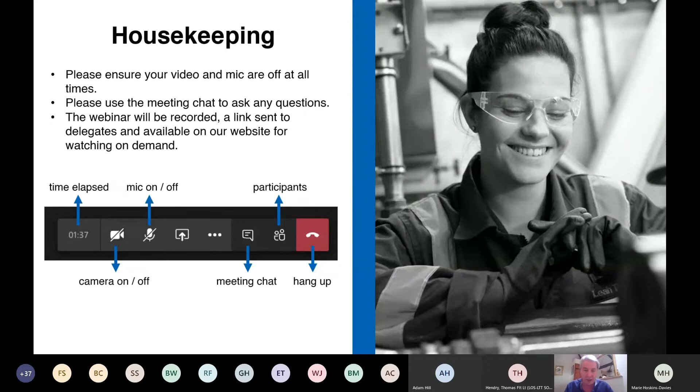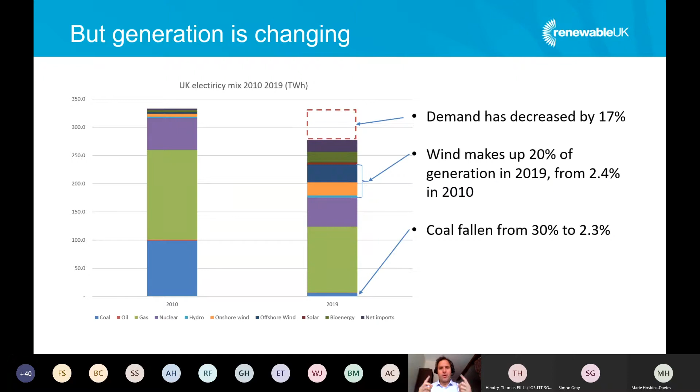What has driven that? If we go to the next slide - two things are driving that and will continue to drive that. The first is the need to decarbonise our energy system and our whole economy. We have the Climate Change Act in 2008 which committed us to reducing emissions, and the update to that committed us to net zero emissions by 2050. So we've got to get emissions out of the energy system, and the easiest place to start that has been power. What that's then also driven - that investment and subsidies in renewable generation has supported those industries, and you've seen costs come down. So that's really accelerating this transition from these fossil fuel generation plants to many now millions of small scale and large scale renewable generation of offshore wind, onshore wind and solar in particular.

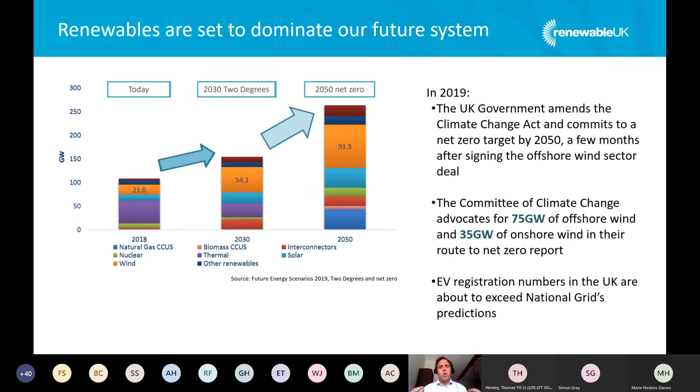So we're seeing this massive change. And what that also means, if we skip onto the next slide, is this sort of change from centralized power generation. In the diamond, you've got the way the system used to be - centralized power generation, then through the transmission and distribution system, bringing power through the wires to user demand, whether that is households or industry or whatever. We have then introduced renewable generation into the mix, and that has started to decarbonise things, but it's going to continue accelerating. As I said at the start, we're moving towards this whole system solution.

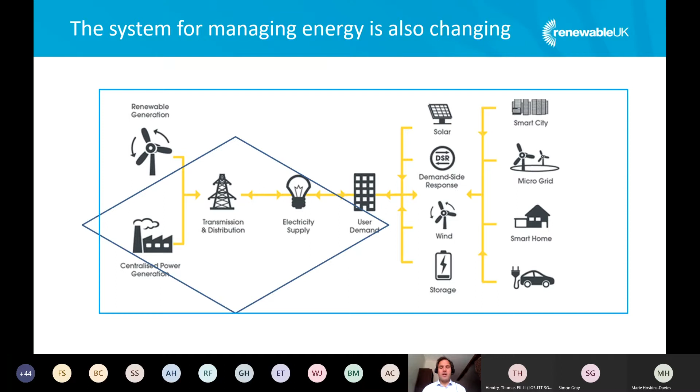And what that means is that because we've got lots more renewable energy on the system, which is cheap and clean, lots of other people are starting to think about how they can take advantage of it and use it in various ways. So we're seeing small scale solar come onto the system - rather than large generation sites, we've got solar on rooftops, and similarly with wind. With electricity costs coming down and renewable electricity costs coming down, we're looking at how we can store it through battery systems, and Matt's going to talk a little bit about that as well. Obviously, cheap electricity is green electricity, and with battery costs coming down, we're starting to see electric vehicles decarbonise. So rather than everyone going to the petrol station to their petrol pump, we're seeing the system change, and all these sectors come together.

Just to jump onto the next slide - we see households changing as well. So the house of the future on the left has lots of electrification in there, heat pumps and now things like renewable heat, battery storage, and thermal storage at home. So again, these sectors are coming together. Everything's being electrified. We're also introducing green hydrogen, powered by new renewable electricity, to turn water into hydrogen and oxygen - that'll decarbonize heat as well. So again, renewable electricity creating green gas, power for vehicles.

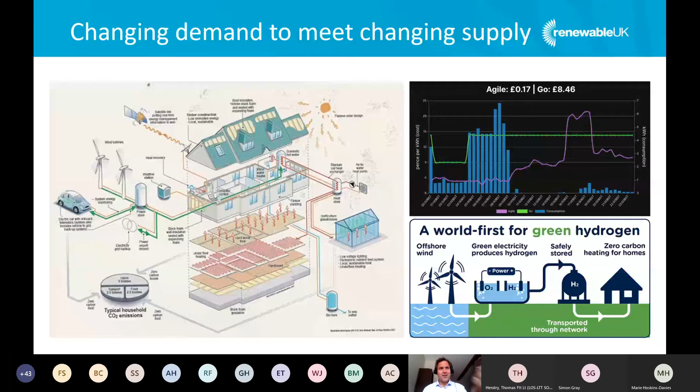Really rapid run through, I think I've gone a couple minutes over, apologies. But over to Matt to say what that means for solar and wind.

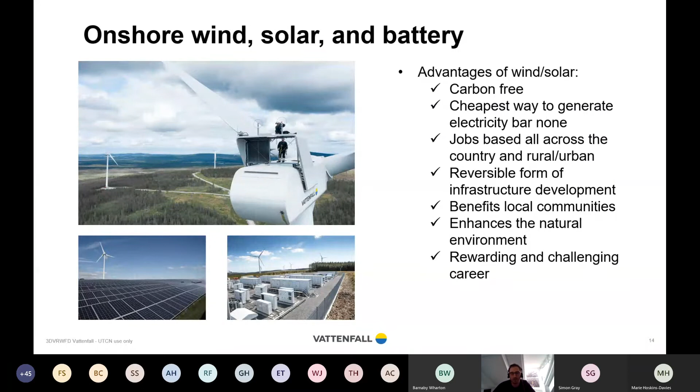If you could skip on one, please. Thank you. This is a little bit of a recap really on what Barney's already covered.

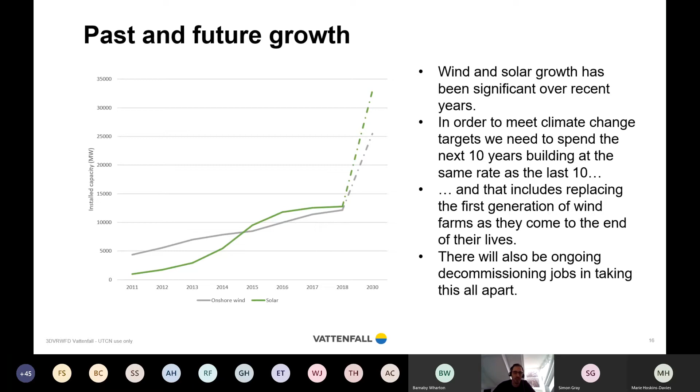The point of this slide really is to say, well, you haven't missed the boat in terms of transferring a career into renewables. We've seen significant growth, the green line for solar and the grey line for onshore wind. We've seen significant growth in installed capacity, but we basically need to do again what we've done over the last 10 years over the 2020s.

Throughout the operational life of onshore wind, solar or battery, there are things in project management, in communications, technical jobs in wind resource and in environmental issues, legal matters, construction management, aviation specialists, technicians, commercial managers, civil engineers, electrical engineers. So there's a huge amount of variety to develop and operate a wind farm.

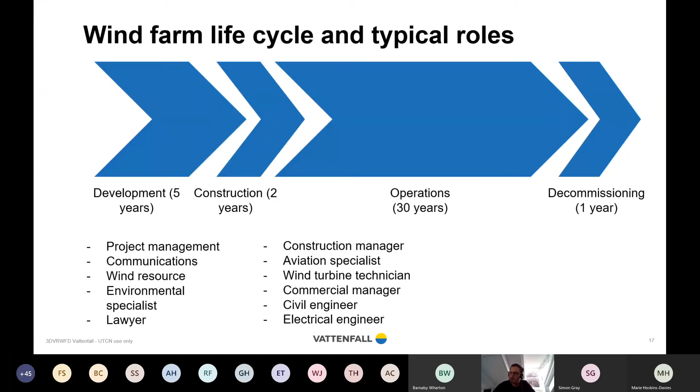Next slide, please. Thanks. And I've done two sort of jobs in Vattenfall really, and I just wanted to reflect on these.

In a public and regulatory affairs role in communications, what's really important is that you're comfortable presenting to people. You've got to be persuasive to politicians. You've got to be able to see the bigger picture—how do government aspirations and energy policy impact on your company? There's a huge amount of information flying around, so sifting through the chatter and noise to understand what the company needs is critical. Energy policy and energy systems are highly complicated, so being able to break those issues down into simple messages is really important.

For onshore wind project management, you've just got to be organized. Basically, you've got to keep track of budgets and timelines, and there's lots of spinning plates. There's a lot of focus on commercial skills—if you're negotiating rents with landowners or contract terms with suppliers, good commercial grounding is really important. Understanding the gist of technical issues, but not getting sucked down into the detail of them. Keeping things happening is probably the most important thing, just keeping momentum. And lastly, resilience against setbacks in your project.

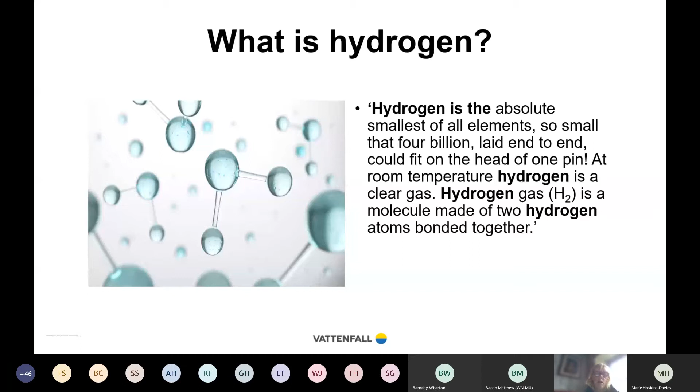Part of the answer to how it will be used, and therefore where the jobs around hydrogen will be created, bearing in mind this is very much future gazing, is around the sectors which are slow or difficult to decarbonize. We know, for example, that heavy industry is very resistant to the decarbonisation process just because of the amount of energy it needs and the temperatures it needs it at. Emissions from industry currently account for about a quarter of all UK emissions, and will need to be cut to nearly zero if we're to meet our climate change ambitions.

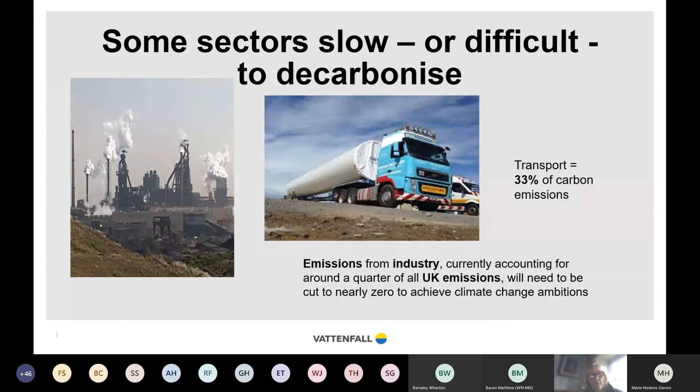Transport, all forms of transport, heavy transport, trains, airplanes, the cars you drive on the roads, account for 33% of carbon emissions. This is another sector where clearly something needs to happen, and hydrogen begins to present something of a solution. Can I have the next slide?

So hydrogen is versatile in terms of supply and use. It's a free energy carrier that can be produced by many energy sources, and it can enable renewables to provide an even greater contribution to the decarbonisation process we're all engaged on at the moment. It has the potential to help with variable outputs from renewables, such as solar photovoltaics.

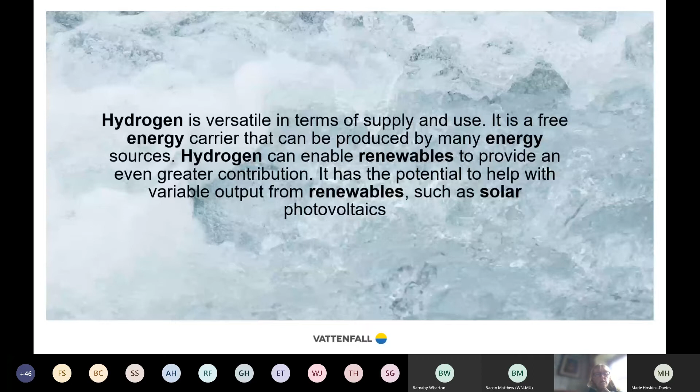So looking to the future, the fact is the future is happening now. So where can hydrogen play a role, and where will we be looking to hopefully invest and diversify into hydrogen going forward?

Well, as an energy carrier to decarbonise processes that are difficult to electrify through direct use of electricity, it can be put into transport fuel cells for heavy, long-distance modes of transport which can't be cost-effectively electrified. I'm particularly thinking about buses and shipping.

Hydrogen is also a feedstock for energy-intensive industries like steel and the chemical sector. Vattenfall in the Nordics is very much engaged with a project called Hybrit, which demonstrates how you can replace the fossil fuels of the past with hydrogen to create the right processes for steel production.

And the one talked about a great deal in the UK is that hydrogen is a provider of flexible fossil-free electricity and heat from combined heat and power plants to support systems with high volatility. This means hydrogen has a large storage potential and is suitable to serve as a flexible fuel in a power system. As the need for renewables increases and there's a need for more flexibility in the system, hydrogen can step in to meet that gap.

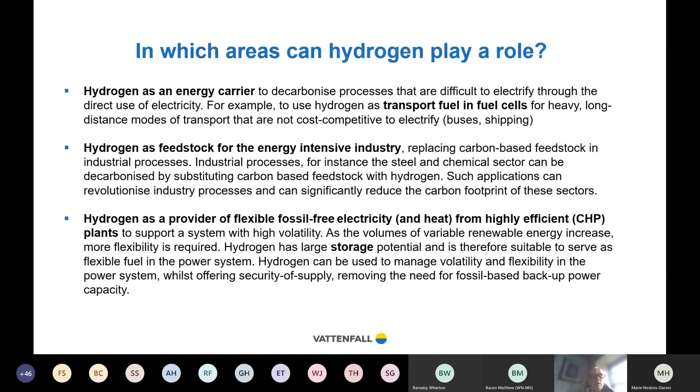Vattenfall has very little on the ground in terms of hydrogen in the UK at the moment, although we are very involved in it elsewhere in Northern Europe. I've already mentioned some of the stuff we're doing in Sweden, but in the Netherlands also, we are engaged in a project to look at hydrogen storage. So we see hydrogen as being an essential fuel for the future, but we also believe the UK could be a world leader in hydrogen production.

However—can we have the last slide, please? We need a few things to happen for that to happen. The first thing I would mention is, and Matt's already talked about the value of onshore wind, but I would also point out that Vattenfall is very much engaged in offshore wind production, and we need an upscaling of the offshore wind industry to bring forward hydrogen at scale.

The reason for that is, as I've already explained, we need renewable electricity to put through an electrolyser to produce the hydrogen at scale that we need.

We need a government hydrogen strategy. Everybody is running around talking about hydrogen in very excited terms, but there are no clear visions coming forward from government—at least the industry is well ahead of it—about where hydrogen can be best used, what this means for jobs, and what this means for the future of the economy. So we need a much clearer idea on all of that.

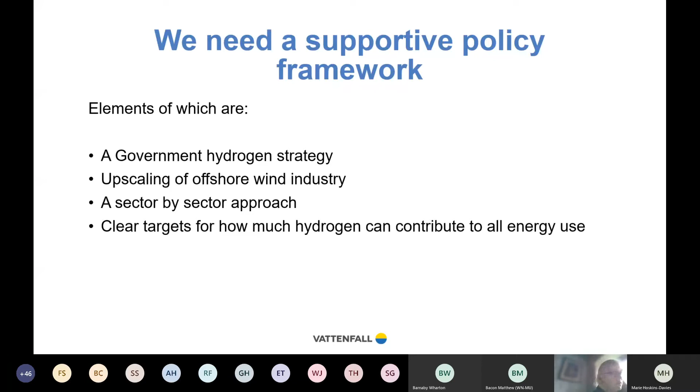Thank you, everybody. My name is Russell Fowler. I work for National Grid, and I look at decarbonisation of transport.

So probably worth giving a brief introduction to National Grid. Always good to know who we are. Broadly speaking, we own and manage the gas pipes and electricity wires across the UK. Now, as this is about e-mobility, I'm really going to focus on the electricity side, but we do own the large gas pipes across the country. The way to think about the wires that we own is they're like the motorways or the big A roads in England and Wales. There's a separate owner in Scotland.

And then underneath us is what we refer to as distribution network operators, and these own the local roads of the wires, so they'll take the electricity to your door.

Part of National Grid is also a legally separate business called the Electricity System Operator. These manage the electricity system. Now, earlier, Barnaby mentioned that you need to balance the system on a second-by-second or microsecond-by-microsecond basis, so this is the part of the business that looks at that. These are the people you often see on television. They have a large war room type control room for the country, and they're frequently on television telling you about how we haven't had any coal generation for 2 months. They've got the longest run since the Industrial Revolution recently, and how we have some of the cleanest electricity we've had now.

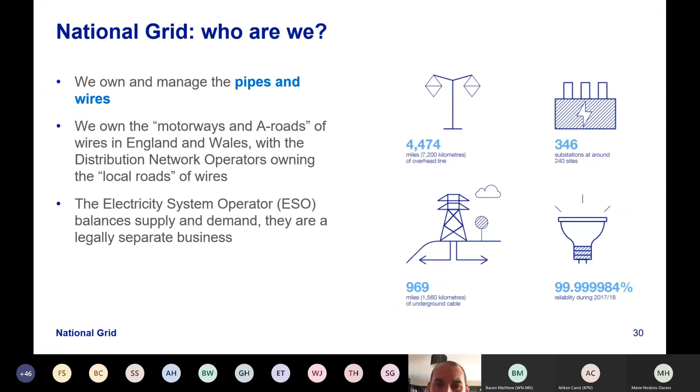So it's worth thinking about what is e-mobility. You often hear this phrase mentioned, saying oh, we need more e-mobility, or we need more development or funding here. So what is this? Very simply, it is just the use of electricity in a vehicle, and this could be from micro mobility - literally e-bikes, e-scooters and bits and pieces like that - right up to very large scale aeroplanes and ships, which in theory you could look to electrify or part electrify.

So in this context, why is e-mobility important? Well, as a country, we've committed to eliminating our carbon emissions by 2050. This is the net zero goal that you often hear spoken about. Now, as Carol mentioned earlier, of all the sectors out there, the transport sector is the dirtiest sector out there. In fact, it has been since about 2017, where it overtook the electricity industry. And that's partly because of the coal closures and the increase in renewables that we've seen on the system, which has been cleaning up the electricity sector. So the transport sector is now the largest emitter. That's why you want to focus on transport and reducing those carbon emissions.

And if you switch from fossil fuels, how most transport runs at the moment, to clean electricity, so renewable electricity, then you will reduce the carbon emissions from transport. So that's the ultimate goal here.

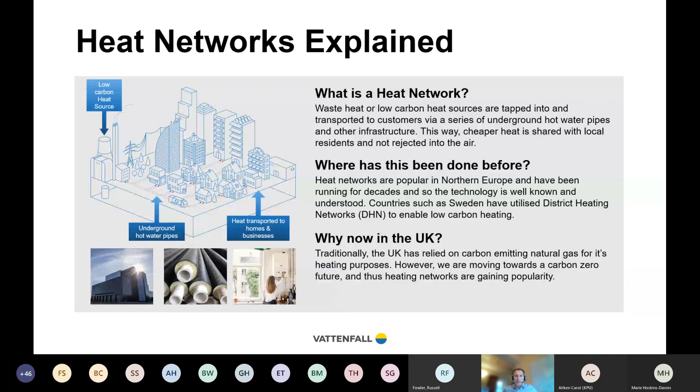If we go on to the next slide please - heat networks are very common throughout the continent. In the UK they are less so, simply because we've had fantastic access to the natural gas resources of the North Sea and a natural gas grid developed over many, many years. But essentially what heat networks do is provide a strong source of decarbonised heat.

The heat is in the form of hot water, which is transported to customers in a series of pipes. So essentially we're in a position where we can move heat around a city. We can take heat from various sources - waste heat, data centers - and we can use heat pumps to generate heat from the ground and from the air.

The key thing is that we're in a phase just now of decarbonising heat. We are looking to digitize heat, for example using data to understand where heat needs to flow to and from, and to measure heat, for example in your home. And we're also in the process of electrifying heat.

And we talked about sector coupling earlier - that's using, for example, the opportunities to take heat from low carbon sources like offshore wind, which are in a rapid phase of development, and utilizing it sometimes where the wind is blowing and there aren't enough consumers of electricity to essentially electrify heat. So let's take that spare electricity and inject it into heat networks.

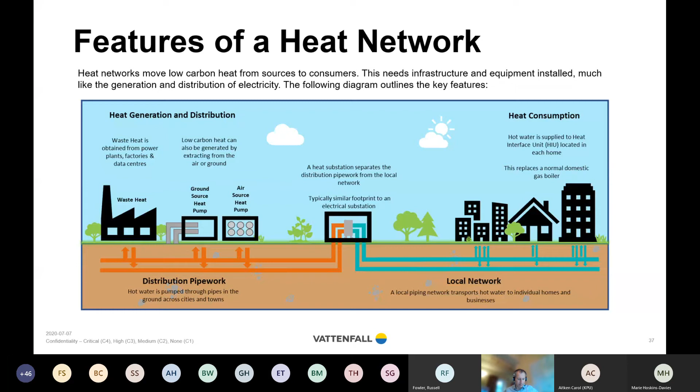So why is carbon important? We're in a fast transition now to move to zero carbon. Natural gas, although a cleaner source of energy, is obviously a carbon emitting source, and we are transitioning away from that. It's also about improving local air quality, which we've seen in the recent lockdown with significant improvements in city centres through removal of vehicles. There'll be a further step change improvement if gas burning is removed from city centres too. We're also meeting new planning legislation, which is driving this change to low carbon fuels within homes and businesses. And as I said before, heat networks can take multiple sources of low carbon heat.

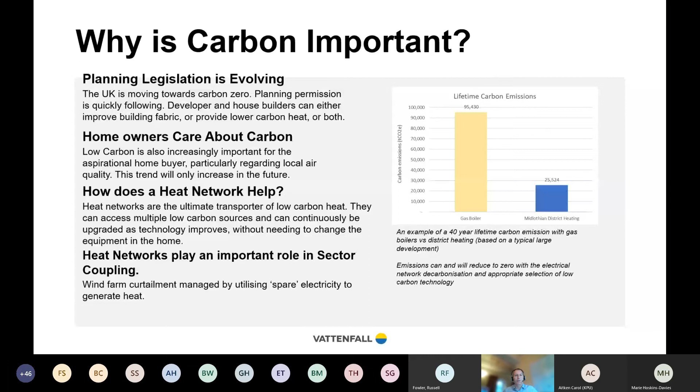I mentioned earlier the heat substation. Think of that as a large single garage, which acts as a breakdown station between the main pipework network and local network. Typically these would serve around 200 homes. It's a mechanism to manage the network, look after things like water quality, measure and monitor any leakage, and potentially manage that local network at a lower temperature. At a lower temperature you suffer less heat losses from the network, but importantly it means you've got more flexibility in terms of managing heat from waste sources.

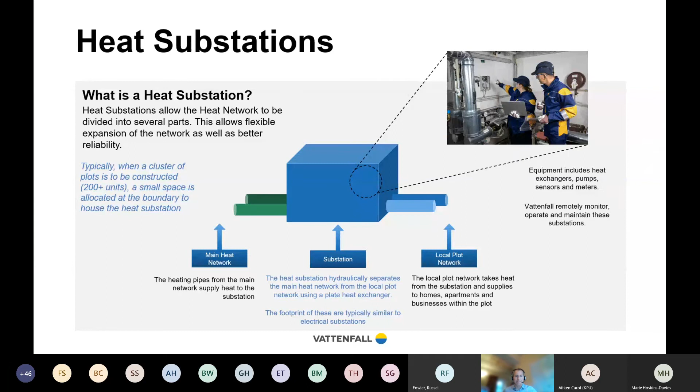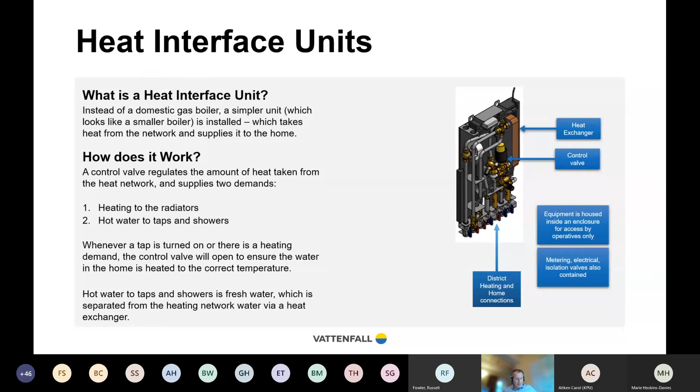Within your own home, if you're connected to a heat network, you would have installed a heat interface unit. Think of that as effectively a small replacement for your gas boiler. It contains the equipment that allows you to take heat from the network and use it within your property for heating and hot water, and isolates your house from the network. It's essentially a heat exchanger.

I talked earlier about digitisation. In the future, and that future is actually pretty well now, we're measuring as much as we can, gathering as much data about the networks we operate. This will make it simpler and much more efficient to operate those networks, because we'll be able to change flow rates, change the heat outputs right down to a customer level, with full visibility of what each customer needs and is using on our network.

This digitisation allows us a fantastic view of our customers. Those are customers that sometimes not only are we selling heat to, but we might also be selling cooling to, because one customer's cooling, when we extract heat from a customer's premises, becomes another customer's heating. This is where heat networks will really start to play a big role, especially in urban citywide schemes. Looking to the future, I think heat will become very much heat as a service, so you won't necessarily pay heat measured in kilowatt hours, but you'll pay for a level of comfort within your property.

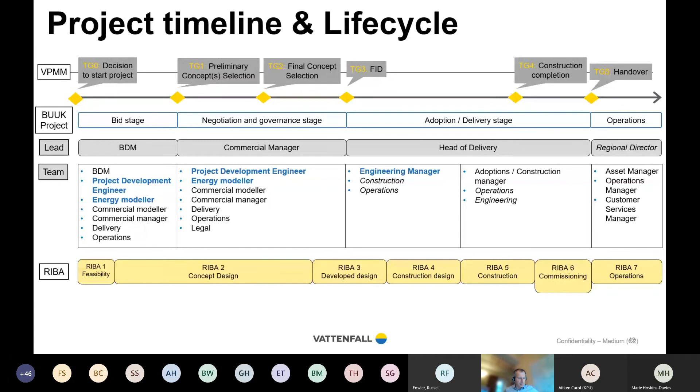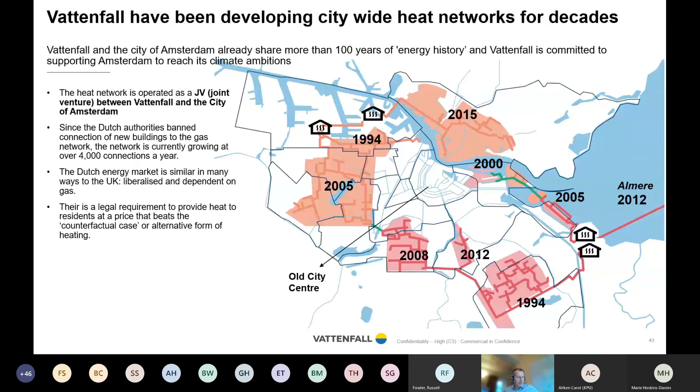A very last quick element on industrial decarbonisation, which I was asked to talk about. This is a complex area, and what I'm flagging here is there's lots of work being done in this area, particularly in the steel industry, where we can now make steel using low carbon sources of energy.

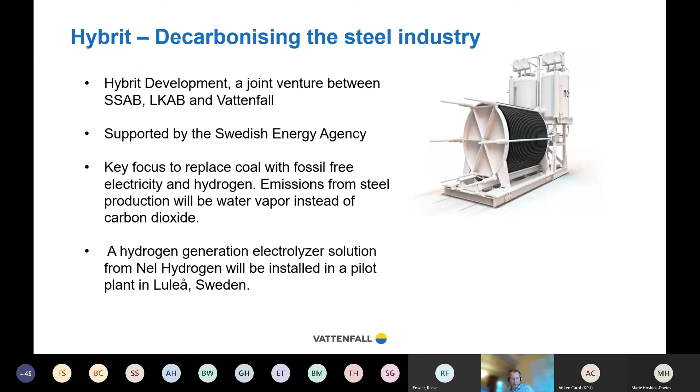My name is Sarah Stone. I am a consultant working for Vattenfall. I work in the onshore team on our South Kyle project, a new project we're about to start construction on. Once it's built, it will be the UK's second largest onshore wind farm. I've been asked to come and talk to you today because I spent a bit of time in the army a long time ago, and I'm also married to somebody who's in the army, so I'm a military spouse.

In my spare time, I do quite a lot of work supporting military spouses and partners of serving personnel. One thing I'd say is that we're your secret weapon—if you're still serving, there's a lot of expertise within the non-serving community. So if you're looking to network with people, it's a great place to start.